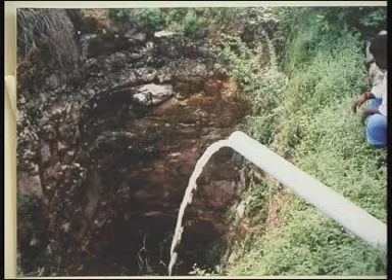Recharging through existing open dug wells. There are several dug wells in the state. In Andhra Pradesh, it is estimated that there are about 16 lakh dug wells. Many of these dug wells presently are dry or with deep water levels.

These open dug wells can be utilized for recharging purposes, and that can be done by collecting the rainfall runoff occurring in the farmer's lands in his own holdings and diverting it through a channel into the well.

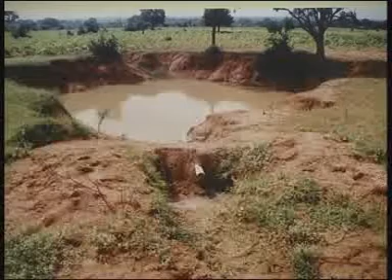When the rainfall runoff has to be admitted into a well, there are two important things that have to be considered. One is the runoff water should not carry any silt or sand when it enters the well. The second thing is that when the water falls into the well, it should fall into the water body of the well, but not on the sides of the well.

When it enters or falls on the sides of the well, it will lead to erosion of the sides and deposition of silt within the well. Under no circumstance should silt or sand be transported into the well through such collection, drain and admission into the well.

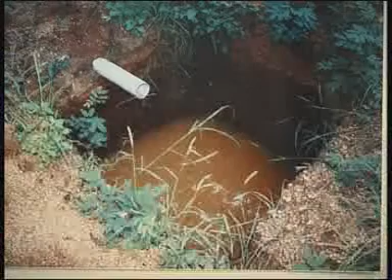To facilitate this type of situation, that is to prevent the carrying of silt and sand through open drains into the well, a simple structure has been designed. The cost of the structure would be around 400 to 600 rupees, including the cost of the pipe, whereas the amount of recharge that would be occurring in the well would be quite significant.

Generally, it works out to something like 1 to 2 rupees per cubic meter of water stored. It gets stored a number of times, and a number of times it gets refilled with water. So therefore, it can be calculated what is the cost per 1 cubic meter of recharge. But if you have to calculate on the stored volume, it varies from 1 rupee to 2 rupees per cubic meter, depending upon the size of the well.

Comparatively, when we see the mini percolation tank or any other device, they are costing more, something like 5 to 10 rupees per cubic meter. But this is working out very low cost because the well is already there. It's not as if we have to excavate a well. It's only a question of admission of water into the well. So therefore, it's highly economical.

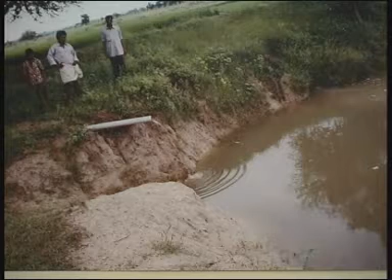And the amount of recharge that takes place through such dug wells is significantly more than any other structure. That is because in the dug well we have the vertical sides or sloping sides, which can also facilitate seepage of water much more effectively than any other structure, and it has got fissured formations at the bottom, which encourages the deep percolation.

And actually it is seen when the well gets filled up with the rainfall runoff, it disappears in a matter of 15 days to 1 month, depending upon the water table level there. And this recharges the water table in the entire terrain. It is something like recharge occurring through a device like a mini percolation tank or percolation tank. And this is also one such device which recharges the water table. It raises the water table.

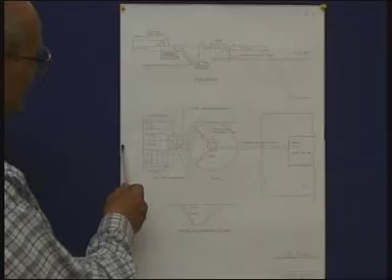And let us now go through the technical details of such a recharge device. This would be a diversion drain, draining water coming from the farmer's holding. It could be something like 4 acres or 3 acres or whatever holding he has, or whatever water he would like to divert from even the neighboring fields also, he can divert it to this canal.

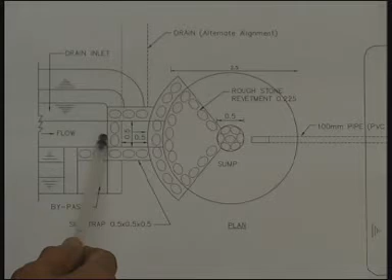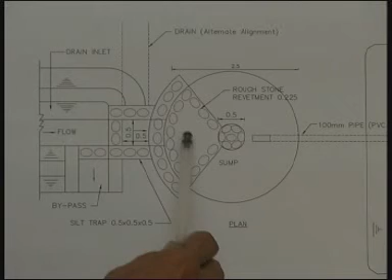And this canal enters a small silt trap, a silt trap of dimension 0.5 meter by 0.5 meter and a depth of 0.5 meters. So this is the silt trap, and when the silt trap is filled with water, it overflows and enters this sump. It is a circular sump, and the water gets stored here, and the water is drawn out through a 100 mm pipe, could be rigid PVC or asbestos cement pipes, and